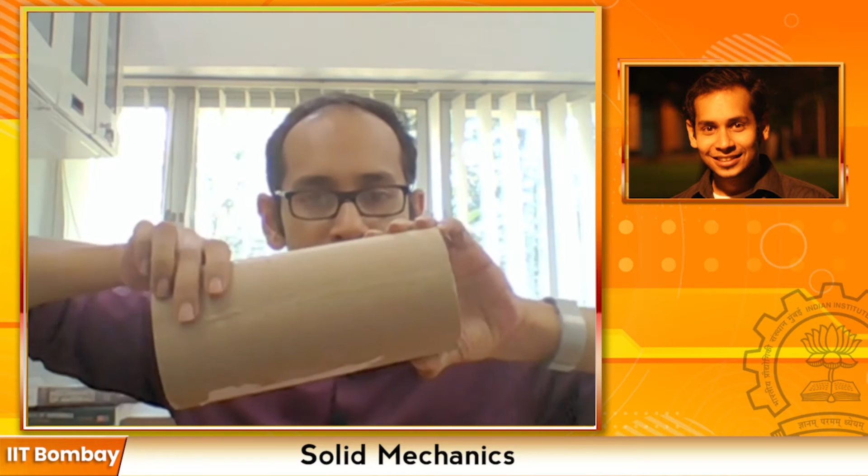As I told you in the introduction, although these loading conditions are more or less completely different—one deals with just pulling or pushing, and the other deals with torsion—there are certain analogies that can be drawn in terms of how the deformations happen. This will help you immensely to derive, analogically, what the angle of twist or some of the other parameters are going to be. Let's first take a look at what this analogy is, and then see how it helps us easily solve problems related to torsion.

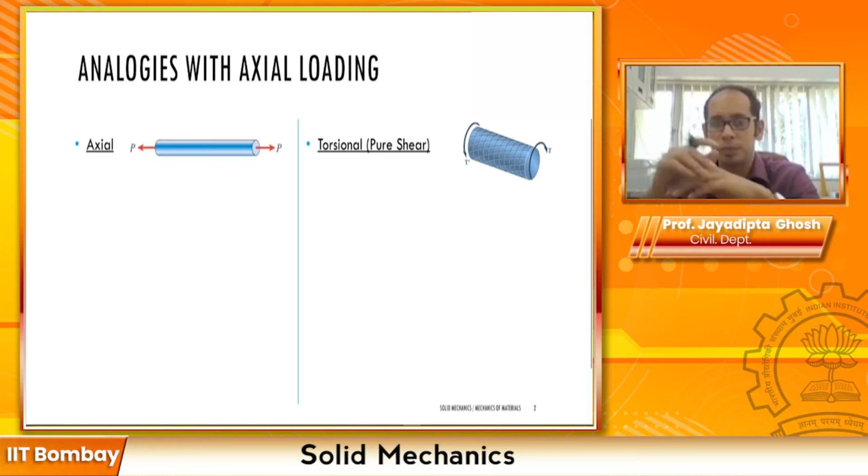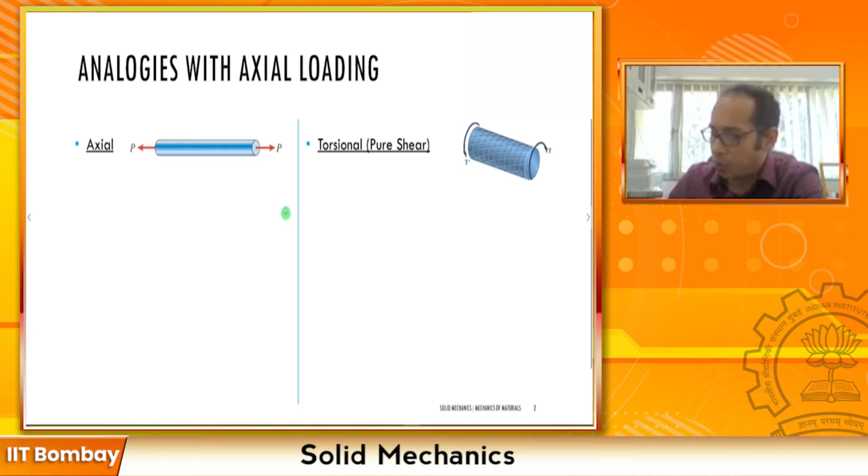So first, let me jog your memory on what we have already learned before. We learned the axial case and the uniform torsion case in the last couple of lectures. For the axial case, remember this was our simple bar with load P at one end and P at the other end to keep equilibrium. For this, we saw that our delta, the deformation of the bar, equals P times L divided by A times E—very simple, PL divided by AE.

Now if you recall what we learned in torsion, the torsion formula we derived was phi, the angle of twist, equals T times L divided by J times G. Can you start seeing the analogy between these two formulas? Take a look again: delta is here and phi is here. Both are somehow measurements of deformation in some sense—delta is the longitudinal displacement, phi is the angle of twist. So both are some measure of deformation.

Coming to the right hand side, here you have P, the applied force, and here you have T, the applied torque. Both formulas depend upon the length of the member, L, in both cases. Now let's come to the denominator: here you have A, the area of cross section, and here you have J, the polar moment of inertia. Here you have the Young's modulus E, and here you have the shear modulus G. Analogically, these formulas look more or less the same.

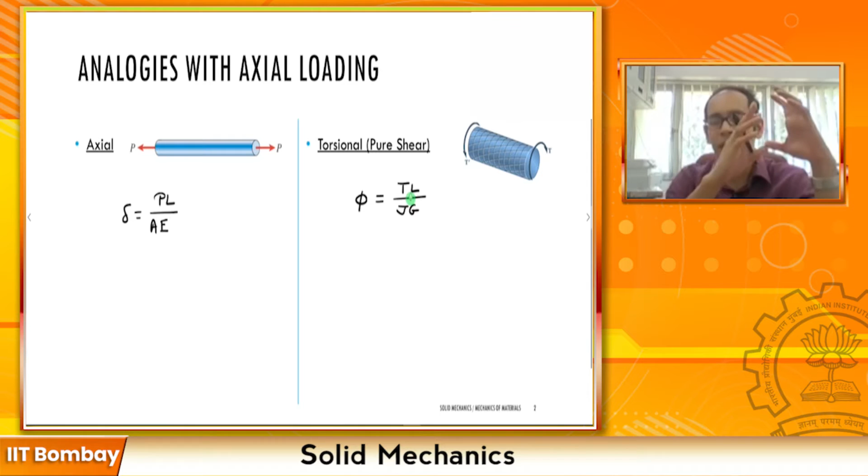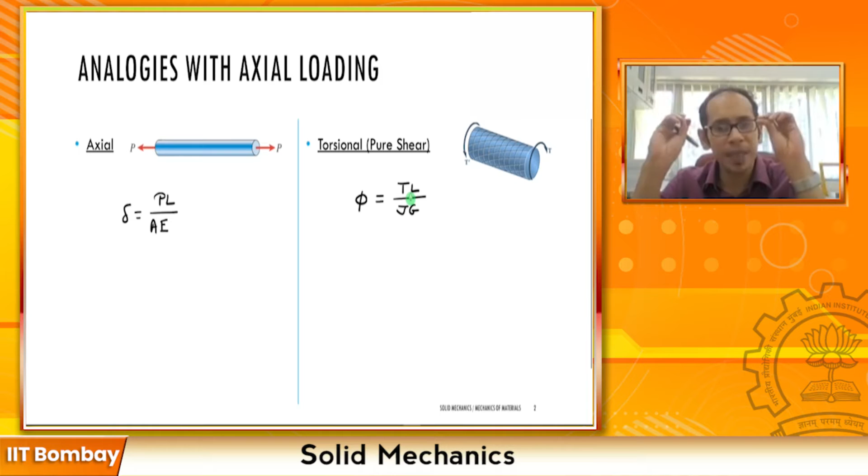So delta equals PL by AE, and phi equals TL by JG—they look more or less the same. Analogically, they are predicting the same thing: one predicts the longitudinal deformation, and the other predicts the angle of twist.

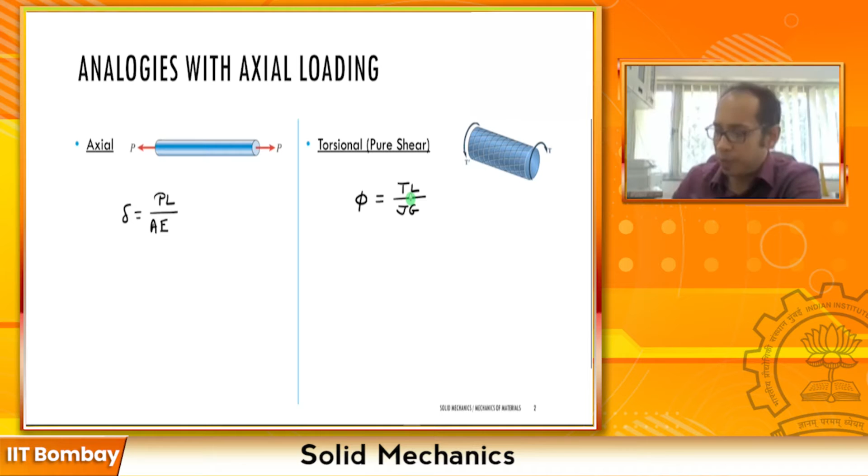Now, going a step further, do you remember what this terminology, AE, was called? Yes, it was called the axial rigidity. Why was it called axial rigidity? Because if you have a structure where A is high and E is high, delta becomes smaller and smaller since it's inversely proportional. So it's making your shaft or rod more rigid against deformation—that's why it's called axial rigidity.

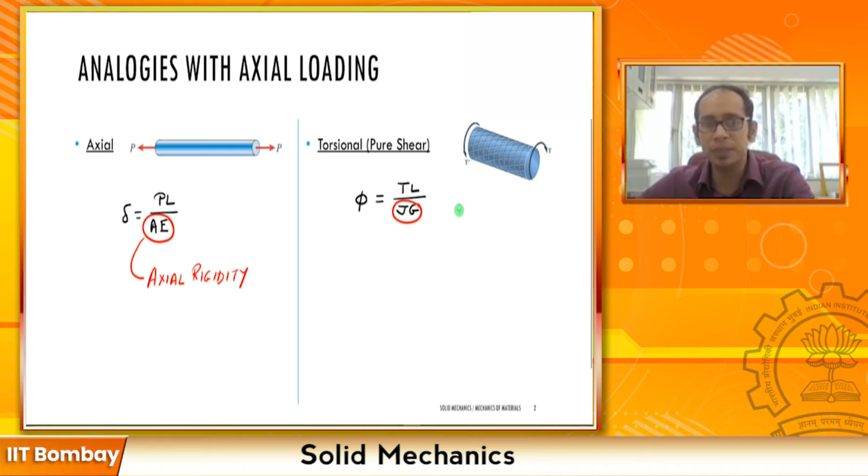Similarly, on the right hand side, take a look at the denominator, JG. The higher the value of JG, the lesser will be your angle of twist, since it's inversely proportional to phi. A higher JG also means you're making the circular shaft torsionally more rigid to resist the angle of twist. So what is JG going to be called? You're right—if AE is axial rigidity, JG is torsional rigidity. You see so many similarities—torsional rigidity.

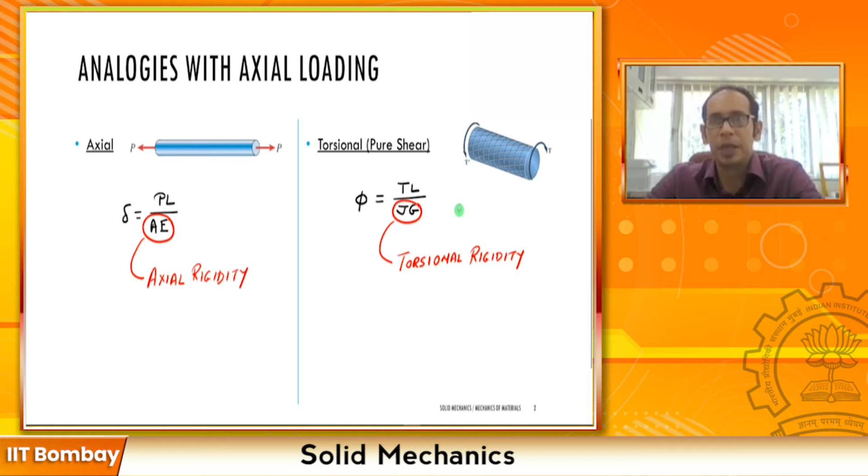Now you will see that once you have established this analogy, some of the concepts that you have studied in axial loading, for example the indeterminate structure, when you had structures with non-uniform axial loading, you will see that similar cases can arise in torsion, and analogically you can solve it in a very similar way.

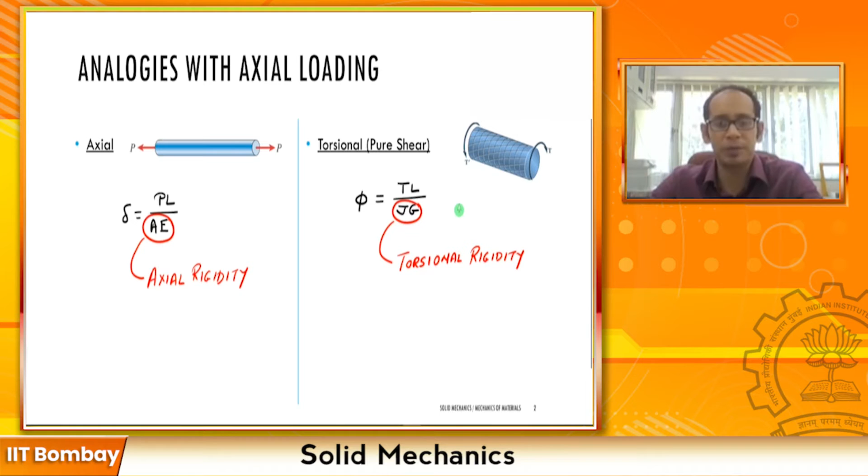So let's go ahead and take a look at some of the problems, the first one. Do you remember the axial case what I have given here? We are going to look at non-uniform torsion, but please recall the case of non-uniform axial loading.

It is still determinate, but do you remember how we calculated the delta? At every discontinuity, in between those discontinuities we had cut the cross sections, calculated the internal forces N, and our eventual delta, that is the total delta of this whole bar.

So this delta is actually delta AC. Delta AC was the sum of the deltas of these individual portions. If A to B was portion 1 and B to C was portion 2, then delta AC, the total delta, is the summation of delta i, which is delta 1 and delta 2, equals Ni Li by Ai Ei.

Now come to the torsion problem and see analogically how much it's going to help you. In this torsion problem, it's non-uniform torsion. You have different torques acting at different points on this shaft, A, B, C, D. This shaft has a circular section and another circular section with a higher cross-sectional area, so it's non-uniform from that perspective as well.

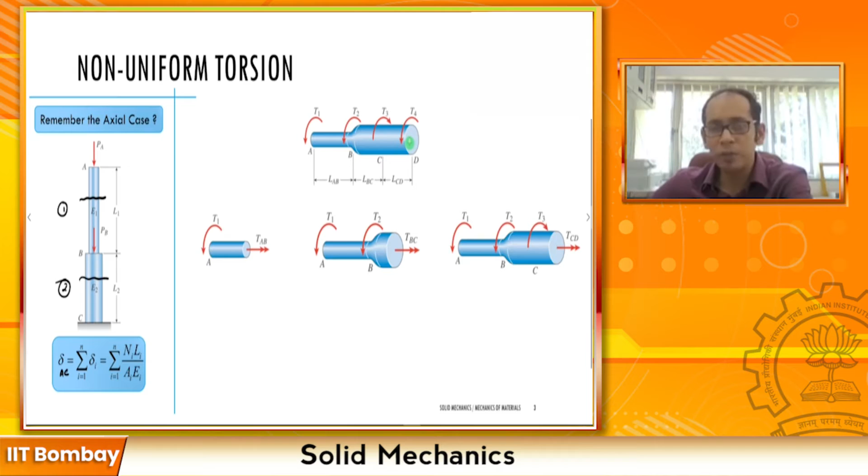So how are we going to solve it? Exactly in a similar fashion as we solved here. In between the discontinuities, I can cut the sections. So here I will have 3 sections: the first one, second one, third one.

For the first one, I can draw the free body diagram. If I separate out this part, on the left I have T1, and suppose the internal torque TAB, let me call the internal torque TINT, just for the sake of discussion. So the internal torque TINT in section 1 is TAB.

If I cut another section 2, the internal torque there is TBC, so TINT 2 is TBC. Lastly, if you cut a section over here, remember, to make your life simple you should probably just take the right hand part of this shaft to draw the free body diagram, otherwise you can do it here as well. So here also I have T internal 3, your TCD.

Now going back in a similar analogy as before, what is going to be my phi for section 1, between A to B, that is the angle of twist in AB? What is this going to be? It's simply going to be the same torsion formula.

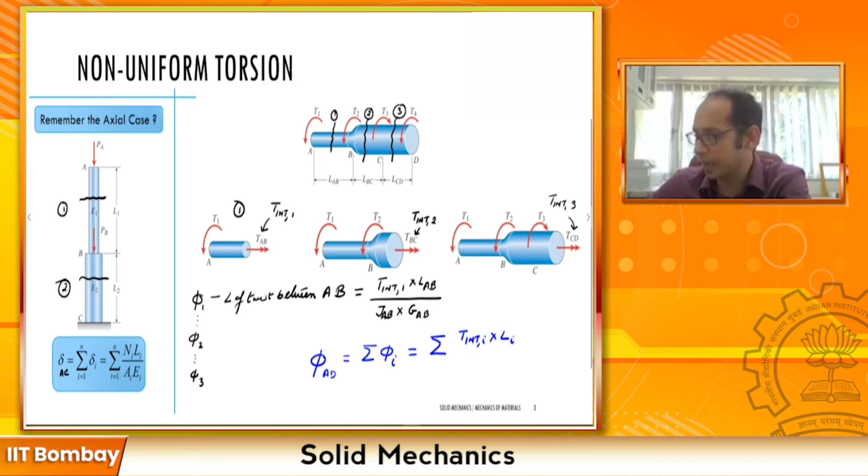So what is going to be my total phi? Remember, total phi is the total angle of twist from one extreme to the other. Here this delta was the total deformation from A to C; here the total phi is going to be from A to D. So my total phi, from A to D, if I explicitly write it, is the summation of phi i, which is simply the summation of T, each internal torque, times the length of each segment—LAB, then LBC, then LCD—divided by Ji Gi.

So you see, analogically it is so similar. If you have properly understood and learned the derivation for the axial case, doing it for the case of pure torsion is actually pretty straightforward.

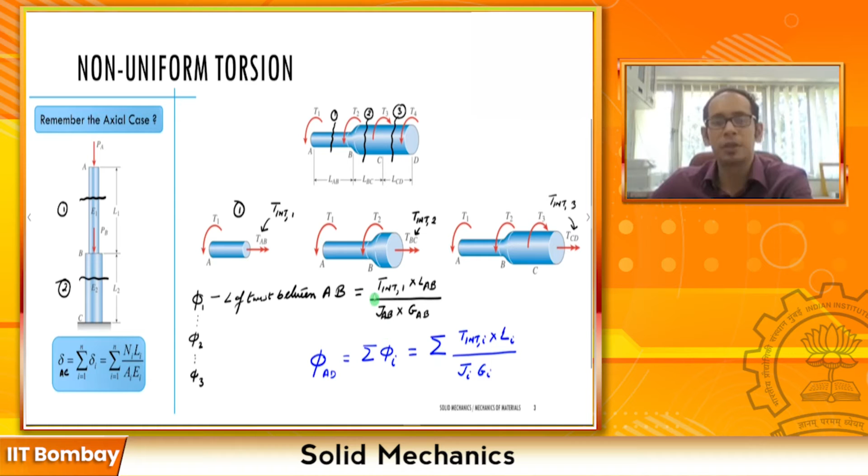Let's go ahead and look at some further analogies. Remember this one where we had continuous gradation of the area, and if a body force is being applied, we cut a small section dx and calculated the internal forces and so on. Here also it is going to be exactly the same thing.

In the axial case you calculated the deformation. In this case you are going to calculate phi, and you can take the free body diagram, calculate and solve it, and you see that eventually the integral comes out to be the same: 0 to L, T internal at point x

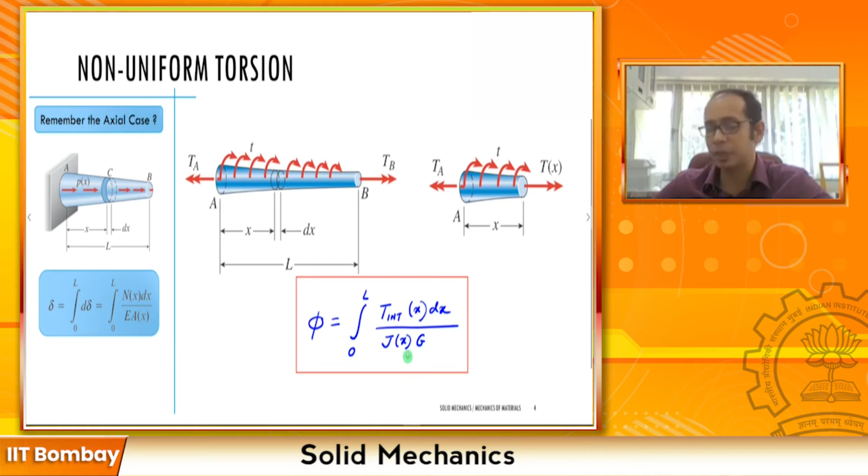divided by J(x) G, assuming it's made of the same material. So analogically again, very similar to what we had derived before: internal force, internal torque, length of dx divided by the shear modulus times the polar moment of inertia. Okay, so let's move ahead.

Now remember that we had also seen for the axial case the stresses on the inclined section. How did we do that? We had taken a section cut at a certain angle for which the normal was making a certain angle theta, and we looked at two extremities for which the normal force becomes maximum and the shear becomes maximum.

This was also the section where we looked at how, if a bar is under pure axial loading, it is not true that no matter where or how you look in the bar, all elements are under axial loading. It depends upon the angle you are looking at.

So if you are looking at an angle perpendicular to the longitudinal axis, then yes, you are only going to have normal stresses. But if you are looking at elements slanted at a particular angle theta, they are going to have both normal and shear stresses.

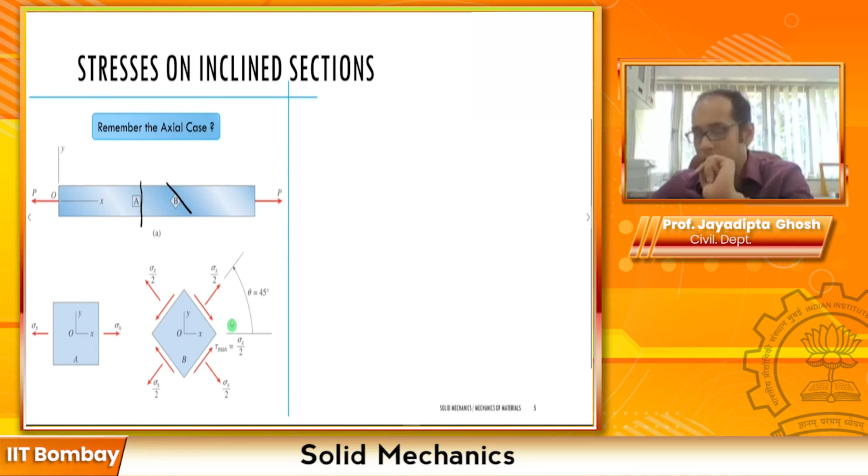Now remember, shear force equals sigma x over 2 did not mean the shear force has become a normal force. It just means the magnitude of tau has become the normal force divided by 2.

Now let's look at the case of torsion. If you do a similar thing here, if you take an element perpendicular to the longitudinal axis, you are simply going to have shear stresses tau from the torque. Here when we took a perpendicular element before, it was just sigma x because of this p.

Here, because of the applied torque, all these rectangular elements on the surface of my member are in a case of pure shear. If I take any element with a face perpendicular to the longitudinal axis, I get this tau. This is in 3D and this is in 2D - if you take a small chunk, that's the 3D diagram, and this is the 2D view.

Now, as I did before, if I come to this member and start cutting angles at different slopes, what do I get?

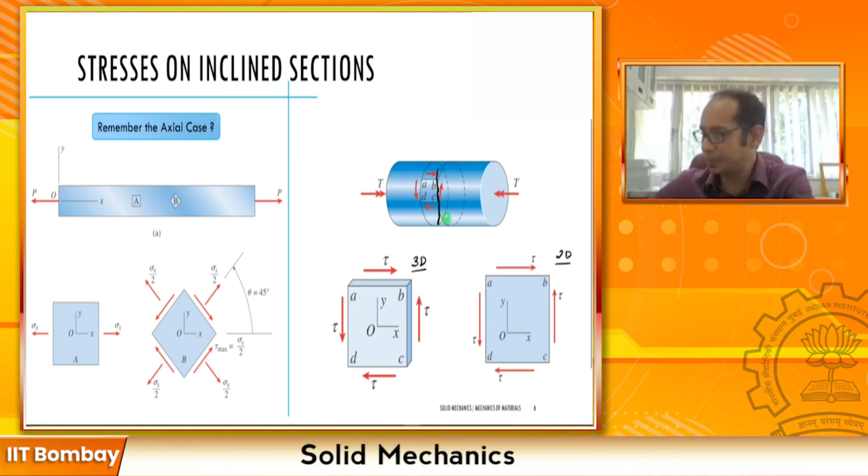Let's see - if we start cutting angles at different slopes, I'm not going to go into the further details of deriving all these equations and arriving at the final formula. You can take a look at any standard textbook; it's just a lot of algebraic bookkeeping. But I am going to give the gist of it, following which it is very easy to write the equilibrium equation.

So here what we have done is cut this member at an angle, the entire section plane to which the normal, this normal vector, makes an angle theta to the horizontal, similar to what we did for the pure axial case. Once you have that, from the stresses you get the forces by dividing by cosine of theta and so on.

In the end, for this configuration, sigma theta boils down to tau sine 2 theta, and tau theta, this particular shear, becomes equal to tau cosine of 2 theta.

Now what can we decode from here? If I take the plane perpendicular to my longitudinal axis, I did not have any axial stress, only shear tau. So that means my normal is exactly aligned here, theta equals 0. If we put theta equals 0 in these equations, we get tau of theta equals tau, and sigma theta equals 0 - it vanishes. So we get back to the original configuration for an element like this.

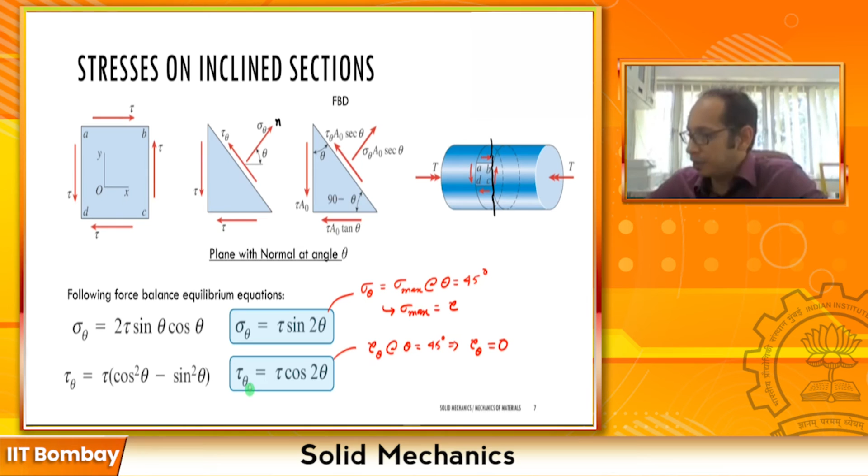So how does this look? If I take an element for which this section is perpendicular to the longitudinal axis, I only have the taus across the faces, no axial stress. Whereas if I take a 45-degree angle, as just derived, I get a maximum sigma, which equals this tau.

And the shear vanishes. So it's an interesting scenario: in this circular shaft, every rectangular element has pure shear, but within the same shaft, at a 45-degree angle, those elements only experience normal stress. This is very important when applying torque to members that are poor in tension and compression - this sigma is a tensile force, and this other sigma is a compressive force. So even if a material is good in shear, if it's weak in tension or compression, as with some brittle materials, you will get failure.

A classic example I'll show using this common classroom chalk. If I apply torsion at both ends - not pulling or pushing, simply applying torsion - this brittle material, weak in tension and compression, fails. If you see the angle at which it failed, it failed at a 45-degree angle. You can see this angle it made here, and similarly here - so it fails at an angle of 45 degrees.

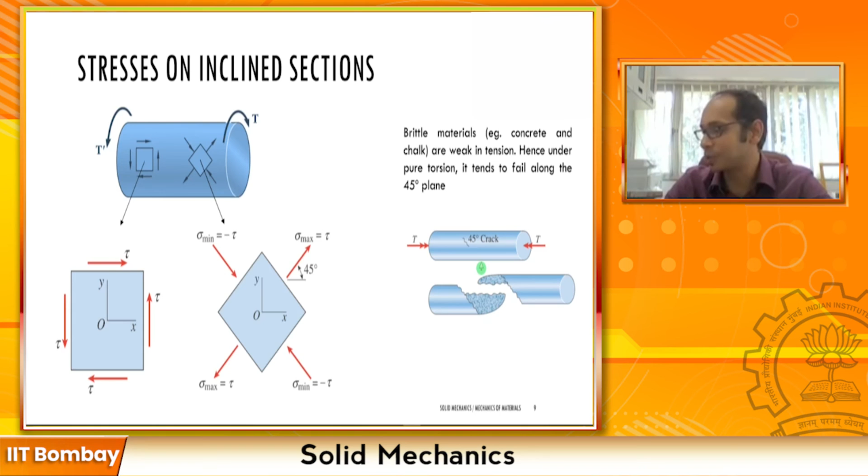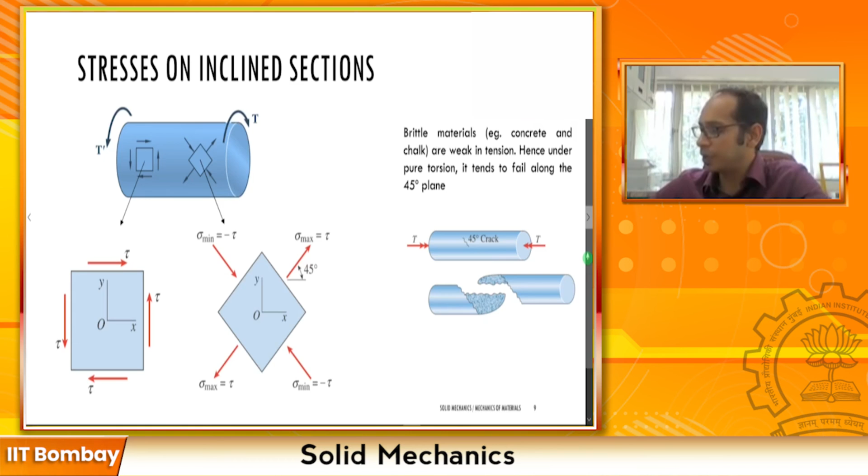So the last thing on this topic is that we have looked at the non-uniform case, non-uniform but determinate. Then we have also looked at the stresses at the inclined sections. The last case, which is over here, is the statically indeterminate case.

What you see in this statically indeterminate case is that, similar to the axial loading case, you have a shaft which may have different cross sections, and it's clamped at this end and this end over here. So these points A and B do not move relative to each other. That means if you calculate the phi AB, the relative movement of B with respect to A over the total angle of twist, it's going to be equal to 0, similar to what you had before.

Remember here my compatibility equations: your delta AC for this particular portion and delta BC for this particular portion overall equal to 0. That delta AB was delta AC plus delta CB, equals to 0. And you had maintained the equilibrium and so on, and eventually derived what the reactions are.

Similarly, for the case of the torque, we can also write the equilibrium equation for this one. Here you see the applied torque T naught. The directions are important. If you do your finger curling for T naught, you will see that the double arrow for T naught points towards this direction, and these are your reaction torques that you have here. So I can write here, I have my TA plus TB equals to 0, right?

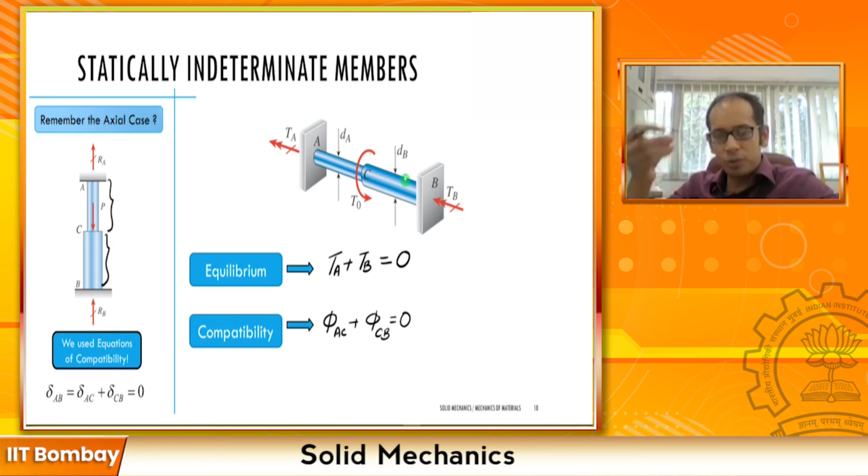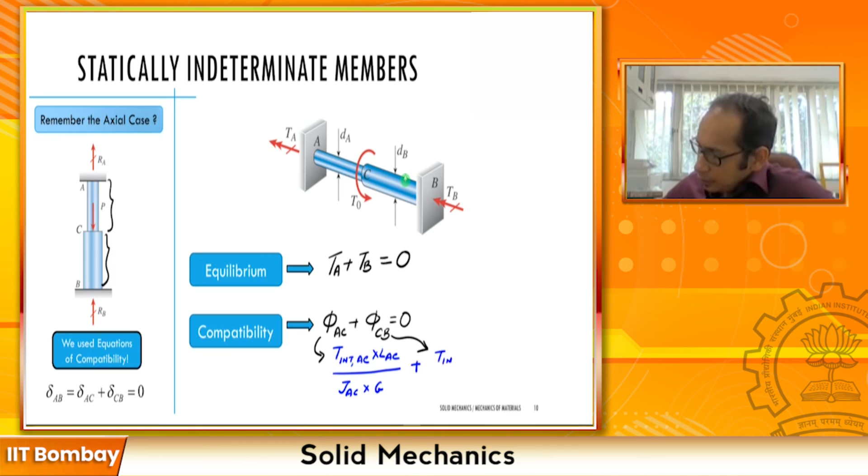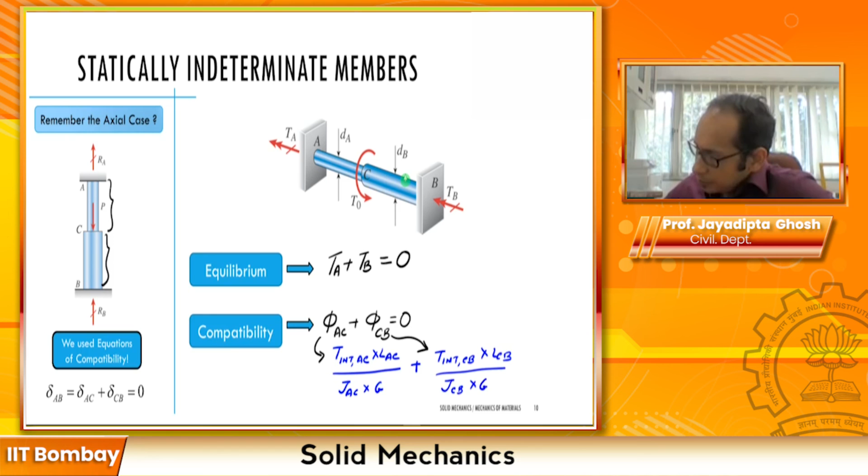Now, if you write it a few steps further, what do you get? Phi of AC is nothing but T internal AC times length of AC divided by J of AC times G, assuming the material is the same throughout. Plus, for this one here, T internal CB times length of CB divided by J of CB times G. And this equals to 0 over here.

Now you have two equations, this one and this one. Of course, you realize that this internal torque must be written in terms of what you get here. For example, for section AC, if you cut a section and draw the free body diagram, how does that look? On the left you have torque A, the reaction torque that is acting. So to compensate that, on the right side I must have the balancing torque, that is internal AC must equal TA.

Similarly, you can write for section CB, so you will have two equations. Eventually this equation you can write in terms of the reaction or the applied torque, and you have another equation. You can solve both to get the reactions that you want, and you can also get those internal deformations, the phi AC, and when you add them up it must equal 0 because you have to satisfy the compatibility.

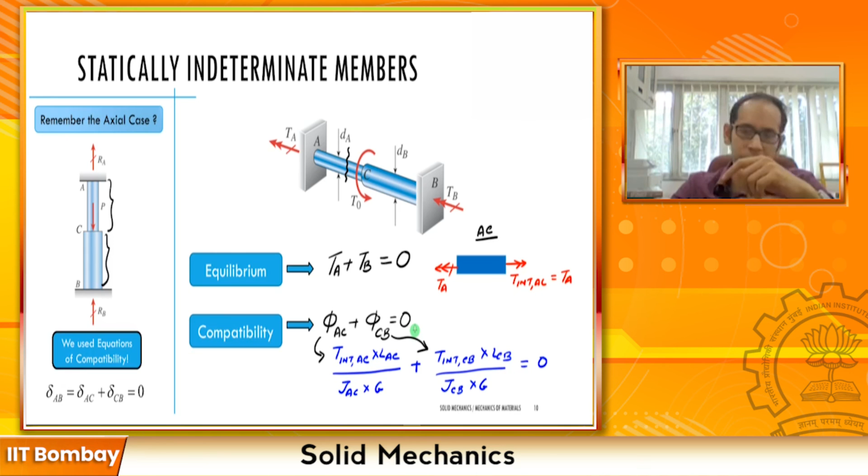Now that we have learned about the cases of non-uniform torsion and the statically indeterminate structures under torsion problems, let's go ahead and look at one application example.